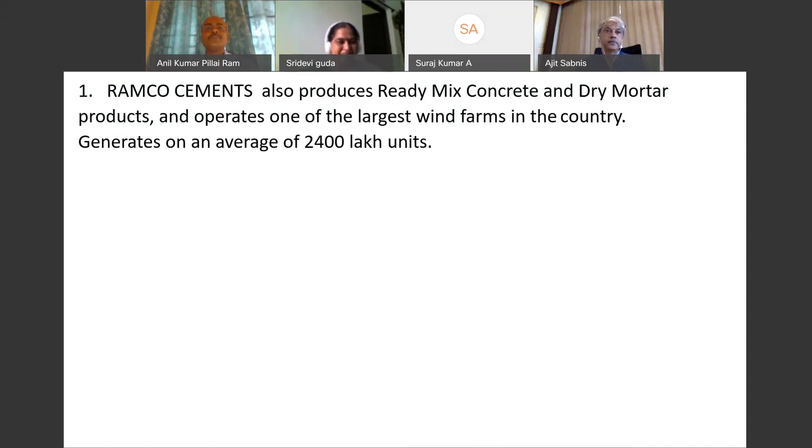Just a brief about our organization. We are also into wind energy, generating almost 2,400 lakh units per annum, related to renewable energy. We incorporate the latest technology and are pioneers in blended cement, which is one aspect of sustainability that has always been of great importance to Ramco Cements. We have won several awards for energy efficiency, as well as in mining, manufacturing, and CSR activities.

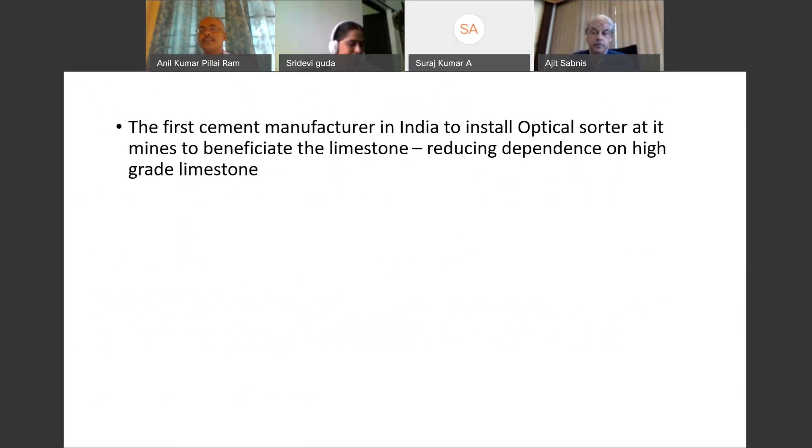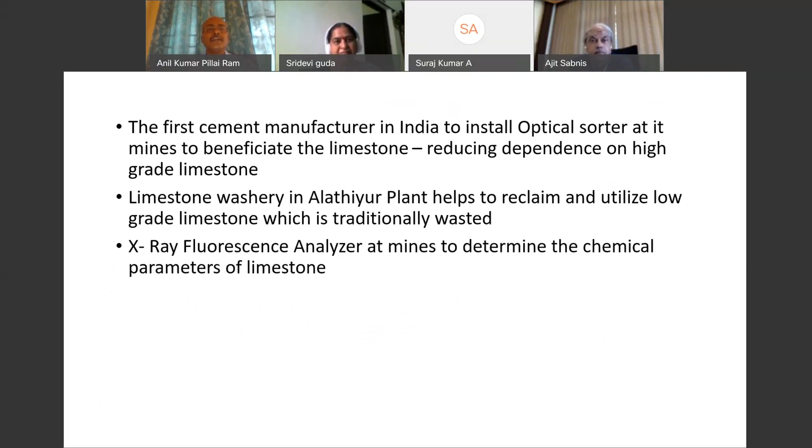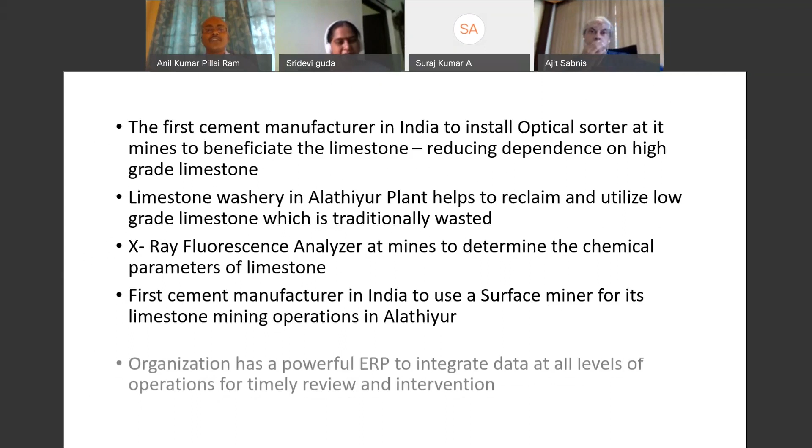Limestone is getting depleted day by day, so we need to manufacture good quality cement while ensuring natural resources are available for future generations as well, because that is what sustainability is all about. We have taken several initiatives in that regard, and we have testing equipment ranging from X-ray fluorescence analyzers, because it's important to determine the quality of incoming raw materials in cement manufacturing. Mining also needs to be environmentally friendly, and we have a powerful ERP to integrate all this for timely review and intervention.

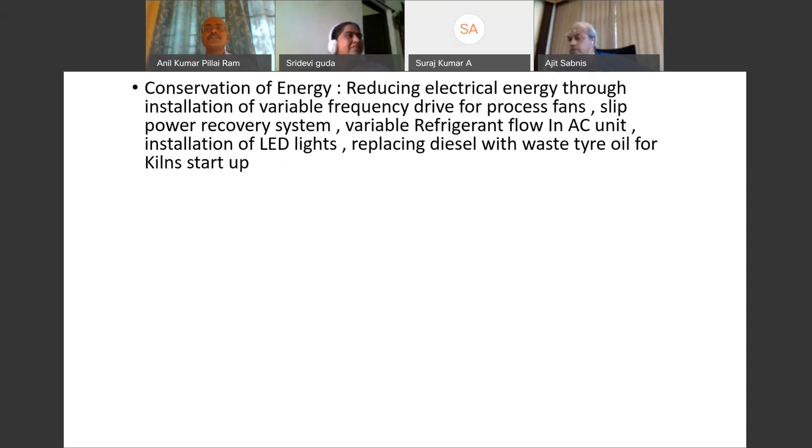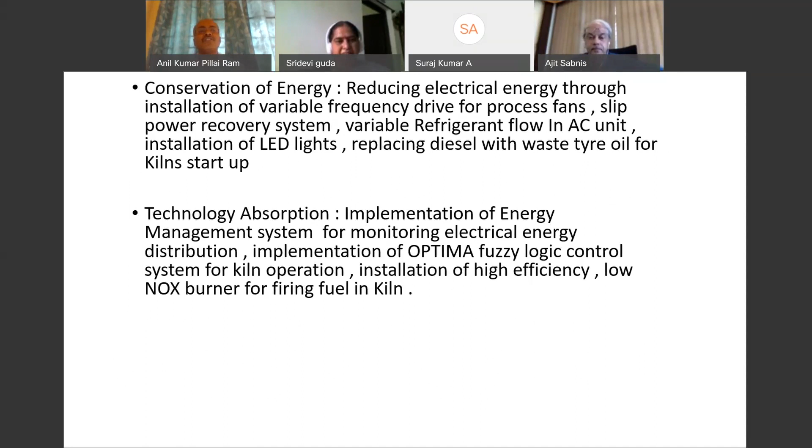These are some of the things. When we talk about sustainability, we are talking about conservation of energy, and technology absorption, because without absorption of technology, how do we make sure the process is efficient and energy efficient? So at every stage of manufacturing, we have this. Most importantly, we need to understand the characteristics of material.

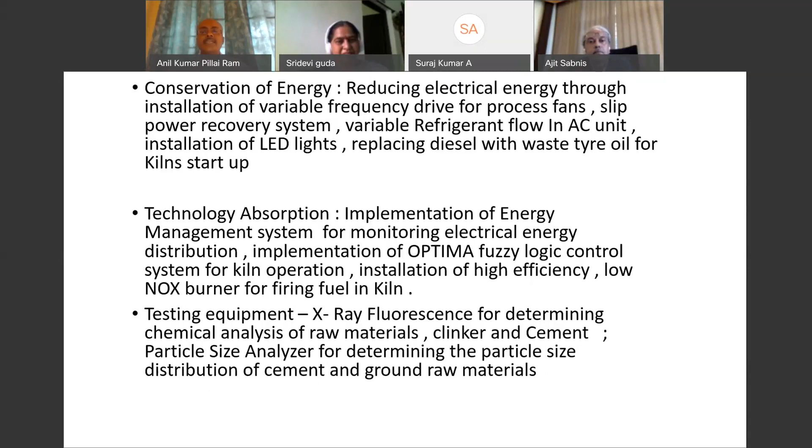As one speaker was telling, there is nothing called waste. Waste is something where we do not understand the characteristics of the material. So as long as we have testing equipment to understand the properties of all materials, I think the recycling and optimum usage of all materials would be very effective.

We have 12 brands of cement customized to various applications, ranging from RMC units to precast units to ordinary residential buildings, and dry mix products from our dry mix plant. We have the Ramco Research and Development Center to ensure good collaboration between site aspects and laboratory work, so we understand the properties of material. That's the idea of having a separate R&D center.

We have this 4 Leaves Award given to us for having adopted technology and energy efficiency measures, point source and fugitive dust control. The interaction with various customers has helped us in various ways to ensure we customize the cement.

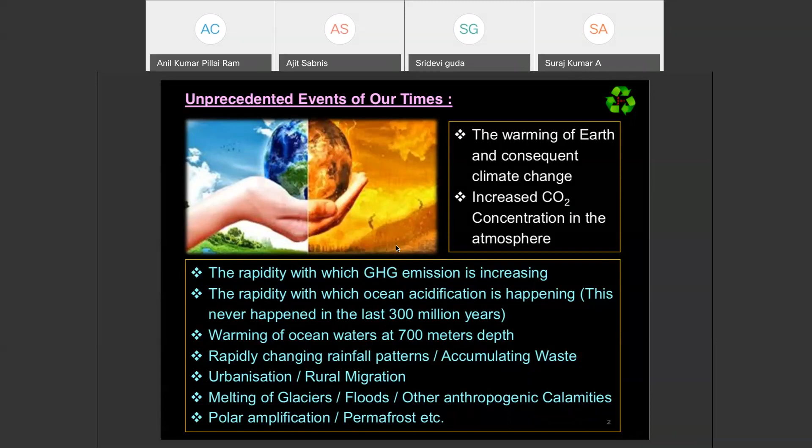Now let us look at the global footprint of buildings and the collective impact of all building materials and services. The World Green Building Council has come out with an ecological footprint, which is on your screen. Global footprint of buildings itself, if you take, it is responsible for 17% of freshwater consumption, 25% of wood harvested, and about 33 to 35% of carbon dioxide emissions.

Here, when we say carbon dioxide emissions, it actually includes several other gases, but because CO2 is very predominant among the greenhouse gases, we call it CO2 emissions, which also includes some of the other gases. It is also responsible for about 30 to 40% of energy consumption, and also responsible for about 40 to 50% of raw material consumption.

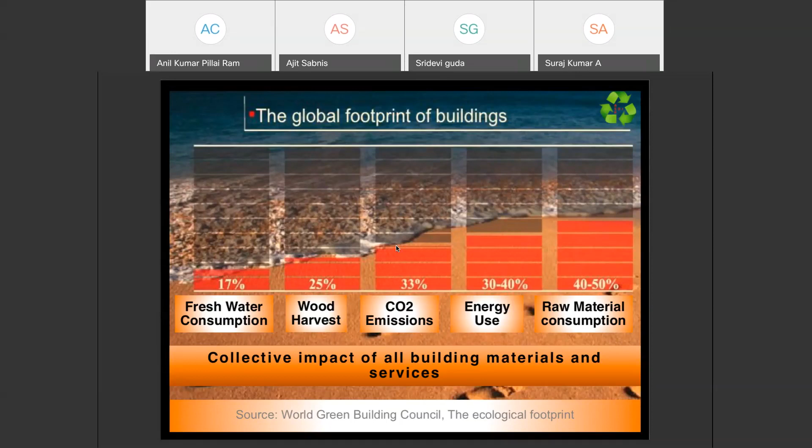Now, if we start looking at these things and come to the carbon footprint of India itself, how the construction industry is happening, how the entire building industry is responsible, what we can see is India has slowly come to be in the third position now in emitting carbon dioxide into the atmosphere. The first two are China and the US.

China, US, and other European countries put together constitute almost about 65% of the total carbon dioxide emission into the atmosphere. Though India is in the third position, even today we are responsible for about 7% of the total carbon dioxide emission. In this total emission, the construction industry contributes, as we saw in the previous slide, about 40% to the global warming or greenhouse gas emissions.

The operation and maintenance phase will consume about 75 to 80% of the energy, and pre-construction phases will have about 20 to 25%. In this, the pre-construction stage and construction phase is the most neglected phase.

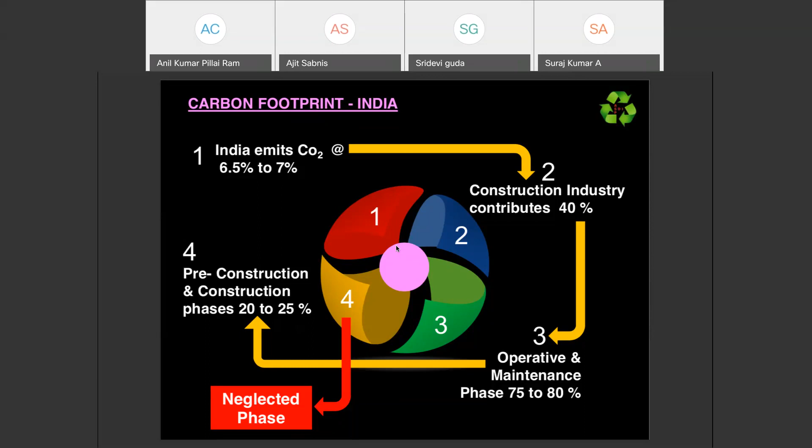Now, why do I say it is a neglected phase? Because green rating systems, etc., give importance to the green building concept and achievement of sustainability subsequent to the construction part of it. So this neglected phase of construction has to actually be given a lot of importance, and we need to see what kind of strategies we approach.

Before we get into what sustainable construction is, we need to understand certain important terminologies. One is, what exactly is sustainable development? Sustainable development is that which meets the needs of the current generations without compromising the ability of future generations to meet their own needs.

This is the World Commission definition for sustainable development. What it means is you don't have to completely dedicate or surrender your needs, etc. But what is important is to take care and keep future generations also in mind. To make resources available for future generations, what is important is the reduce, recycle, reuse concept, and then the true sustainability concept has to be understood.

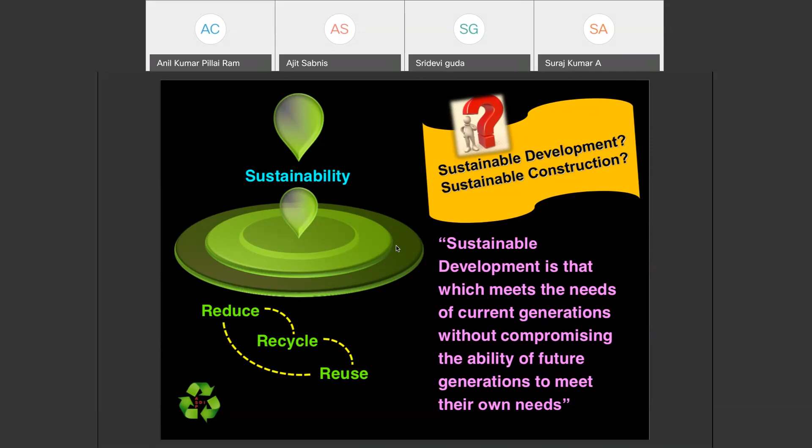Now, what exactly is sustainable construction? Once we understand sustainable development, what exactly is sustainable construction? Sustainable construction has not been very satisfactorily defined yet. We are not able to do it very satisfactorily, but there are several definitions.

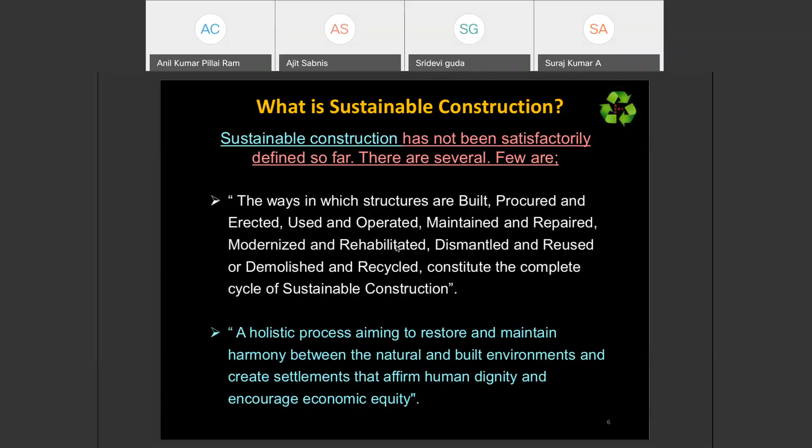Just to cite a few, the ways in which structures are built, procured, erected, used and operated, maintained and repaired, modernized, rehabilitated, dismantled and reused, or demolished and recycled, constitute the complete cycle of sustainable construction. The second definition says it's a holistic process aiming to restore and maintain harmony between the natural and built environments and create settlements that affirm human dignity and encourage economic equity. We have quite a few other definitions, and one of the most important, which I feel is applicable now, is the underlined one, the last one on your screen.

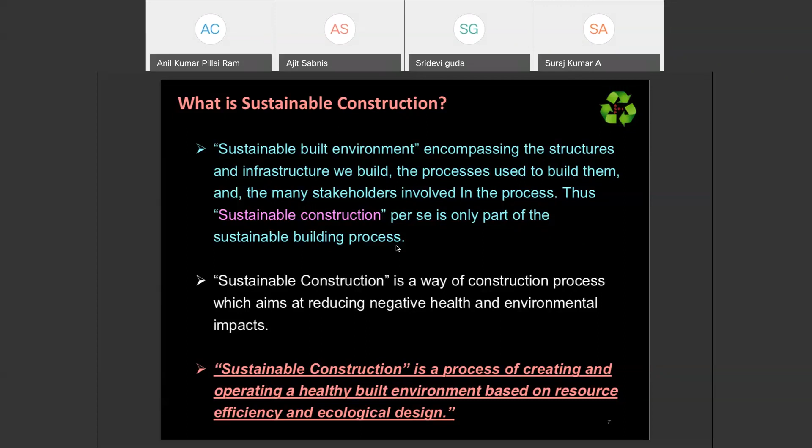I hope my talk and the screen is available to you, right? Yes, yes. If there is any problem, we will let you know, sir. It's very much clear.

Now, let us quickly understand what exactly is the greenhouse gas effect. Greenhouse gas is a gaseous compound in the atmosphere that is capable of absorbing infrared radiation, thereby trapping and holding heat in the atmosphere. Accumulation of GHG also leads to the greenhouse gas effect, and this subsequently leads to global warming.

These greenhouse gases form a blanket in the atmosphere, in our biosphere, which holds the temperature below the blanket, and which will increase the temperature.

On the screen, you see carbon dioxide, methane, nitrous oxide, perfluorocarbons, etc., which are the greenhouse gases. But the majority of it is carbon dioxide, and that is why when we say carbon footprint or carbon emissions, we actually refer to all the other greenhouse gases. Also, all these greenhouse gases are actually converted equivalent to carbon dioxide.

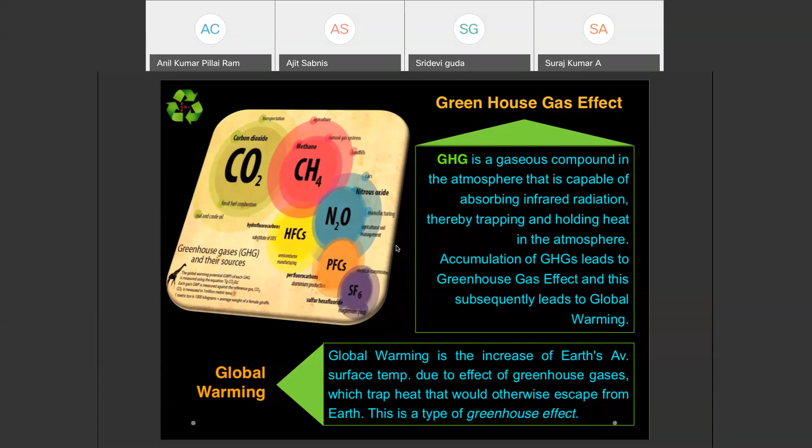Even assuming that if we stop everything at this point in time, there is already an accumulated effect of about 30 to 40 years. So whenever we design a building with a design life of about 50 to 60 or 60 to 70 years, if we do not take the greenhouse gas effect into account or make the building sustainable, we are not doing justice to our design. Our designs are not sustainable at all in the first place because there is already an accumulated effect in the atmosphere.

This greenhouse gas effect leads to global warming, an increase in the Earth's average temperature. This is the Earth's average surface temperature due to the effect of greenhouse gases.

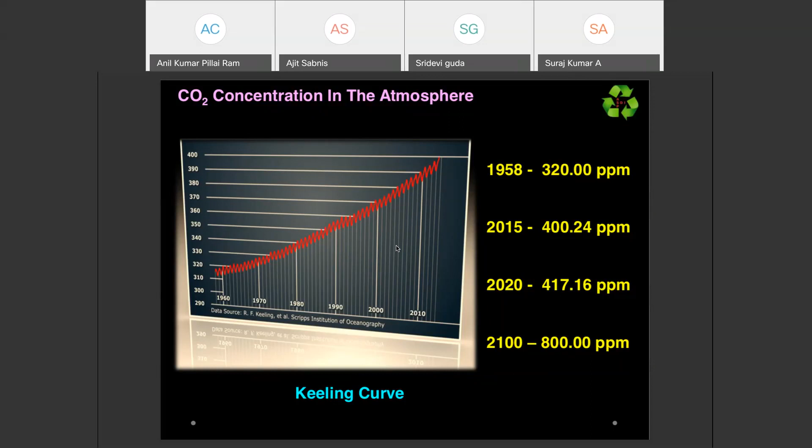From 1958 till 2015, we were in the range of 300 and less than 400. In 2015, we crossed the 400 ppm mark, and in 2020, as of yesterday, the data is 417.16 ppm. Every day, the carbon dioxide concentration is measured, and there is a table maintained by the coordinating agencies; this figure of 417.16 ppm is yesterday's record. By 2100, it is going to be 800 ppm, and they say approximately immediately after we cross the 500 mark, there will be huge health hazards and a lot of adverse impact and much deterioration.

And so that is why all the 195 countries, all these green summits that take place internationally under the umbrella of United Nations, the 2030 agenda - according to the agenda, we have to restrict the increase in temperature to less than 2 degrees. The 500 ppm, once it crosses, the 800 ppm, when it crosses, it is approximately about 4 degrees increase in the average surface Earth temperature.

Now let us understand what global warming potential means. As I said earlier, carbon dioxide is taken as the base greenhouse gas, and if its global warming potential, GWP, is 1, all other greenhouse gases are quantified in terms of carbon dioxide as its base. For example, methane is 25 times deadlier than carbon dioxide, and perfluorocarbon is about 7,400 to 12,000 times deadlier than carbon dioxide. But all the other gases remain for a very short time compared to carbon dioxide's existence in the atmosphere. That is why the most important greenhouse gas that concerns us is carbon dioxide.

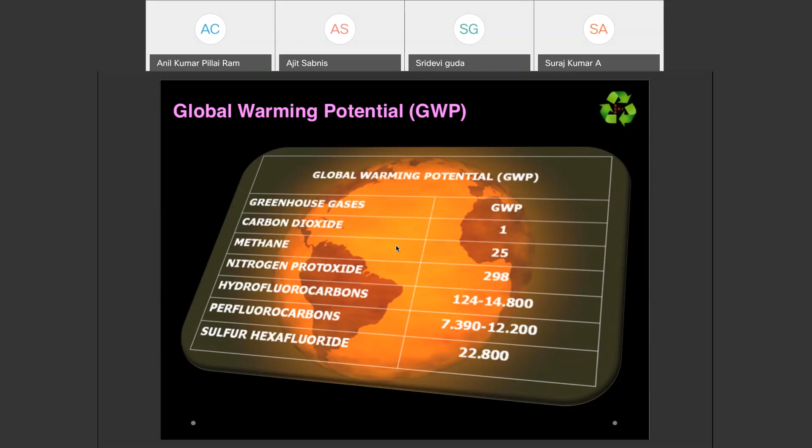So as we see in the next slide, when we talk about global warming etc., I also talked about the 2030 agenda. Now all the 195 countries across the nations are meeting almost every 2 years, drawing up lots of details. Every country has what are called national voluntary disclosures about how they're taking up the sustainable development goals, etc.

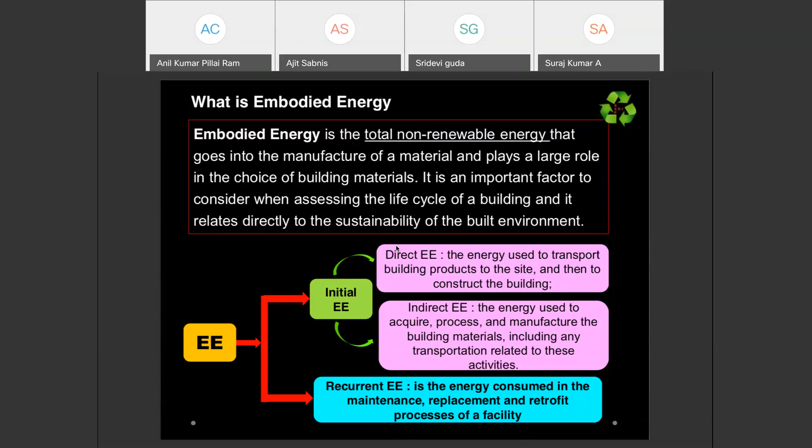The second part of it is the recurring embodied energy. The recurring embodied energy is the energy consumed in maintenance, replacement, and retrofit processes of a facility.

So once we have understood what embodied energy is, now let us understand what embodied carbon is. Embodied carbon is the carbon footprint of a material. It considers how many greenhouse gases are released through a supply chain. Embodied carbon is usually expressed in kg carbon dioxide equivalent per kg.

And I forgot to tell you, embodied energy is always expressed in terms of joules or megajoules per unit. It can be megajoules per square meter, megajoules per kg, megajoules per volume or cubic meter, anything - joules, megajoules, or gigajoules, as the number increases.

So embodied carbon can also be measured into the five principles I mentioned. On the screen, what you're seeing is the embodied carbon of building materials. There are a lot of inventories which are being updated from time to time.

There is a very popular inventory called ICE - if you go to Google, they will give you a chart that is being updated. There is also an updated chart done by New Zealand, and one being updated by ASEC, which I am also a part of. So this updating of embodied carbon, embodied energy, etc., is happening continuously.

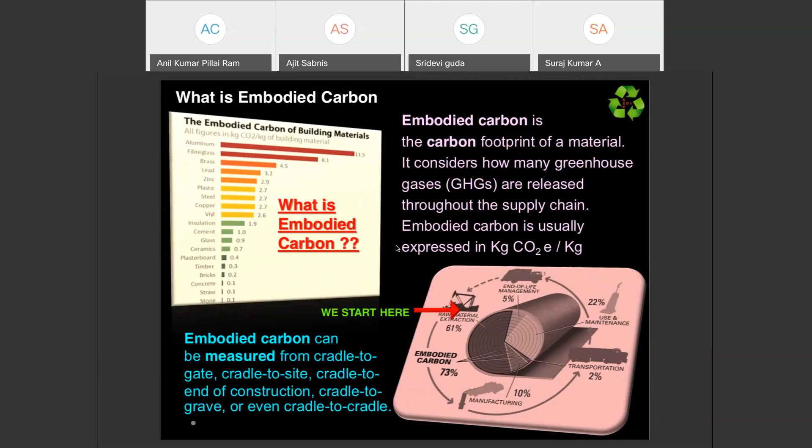So its impact - suppose even if it stays without any damage or repairs for the entire design life of a building, even if you take about 50 years - the impact of aluminium gets distributed over a large period. So per year, if you calculate the impact, it works out to be much less than other materials. So it becomes very important for an engineer to use his discretion.

Now this is just an example to show you what exactly the cradle to cradle principle and embodied carbon means - the same thing applies for embodied energy also. The energy to dig the raw materials, the energy to shape the sand, water, etc., then to heat and make blocks at the factory, then the transportation, then the energy of the tower crane, you see.

So it is shifting of the material, and this is actually the cycle which keeps happening.

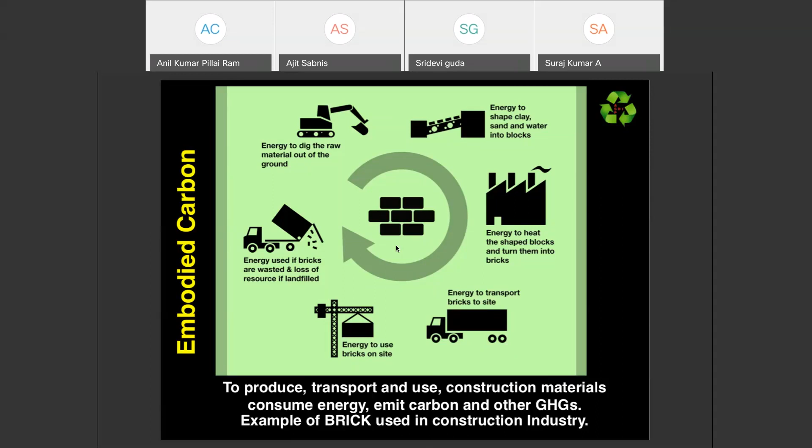Now we come to what exactly is urbanization. This is not something I have to explain; we are already seeing quite a bit of this. By 2050, about 70% of the global population will start living in urban areas.

But by 2050, scientists still hold that the global population will start living in urban areas. So it is the urban area which becomes more and more important, and it becomes extremely difficult to get land. There will be pressure on the land, etc. So the sustainability aspect becomes more and more critical for urban areas as they keep growing, and we keep accumulating higher and higher population.

Now let us come to this case. So to me, focusing sustainability aspects on urban areas rather than rural areas becomes more and more critical from a civil engineer's point of view.

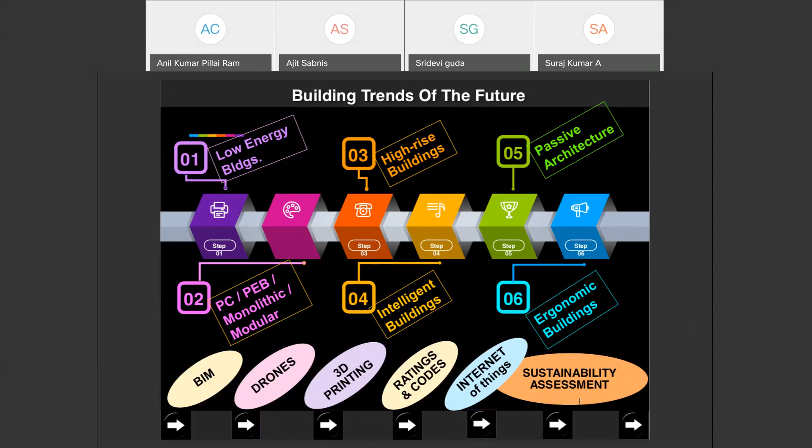So these are the building trends in the future. Now, in a nutshell, let us come to what exactly is sustainable construction. Sustainable construction involves a very wide scope of activities, primarily put under 6 categories. What are these 6 categories, which you are now seeing on your screen?

The first one is the space and structural design part, which becomes extremely important—the space designing, how do we allocate the space. That is the architect's role, and then the engineer's role; everything comes together. How do we manage the space available? As the days progress and the population increases, this space allocation becomes

more and more complicated. Then we have conventional and alternative materials, and along with these alternative materials, there shall be a huge amount of new generation materials which come into the picture. Then there is sustainability assessment, and construction technology.

As I said, what kind of technologies—whether we use slip forming, climb form technology, conventional or any other precast, modular, monolithic, etc.—that becomes extremely important. And building automation, as I said, comes into the picture, artificial intelligence comes into the picture.

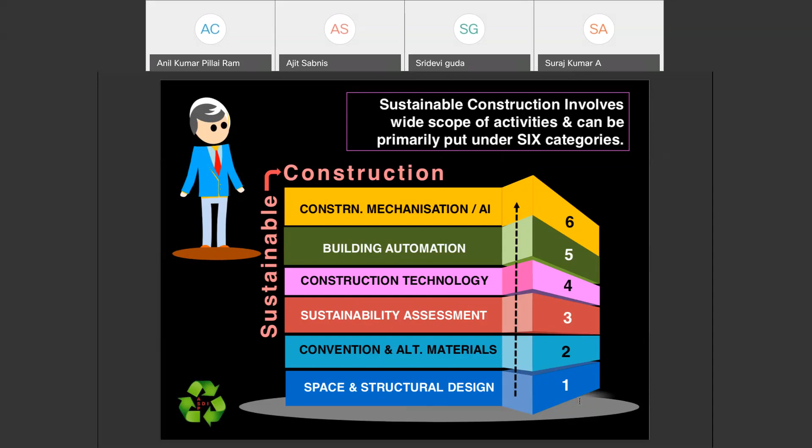And construction mechanization is going to play a major role, which becomes inevitable. This helps to a very great extent—how do we actually account for the shortage of labor, etc. These things come into the picture.

Now, slowly we are actually coming and moving towards sustainable construction. We understood what exactly is the definition of sustainable construction, the different terminologies involved, and the main 6 phases of construction activities. Sustainable construction is not just on-site construction; it involves all that we saw in the previous slide.

Now there is one more important thing. If you take the life cycle of a building, it has got 4 phases. The first is the pre-construction phase, the second is the construction phase, the third is the operating or operation and maintenance phase, and the fourth is the demolition phase.

Now, the total energy consumed breaks down between 20 to 25% and 75 to 80%. About 75 to 80% belongs to the operating and maintenance phase, which is mostly streamlined because of new generation materials, building automation, and the efficiency of gadgets, lighting, and equipment used for human comfort. All these things are more or less streamlined.

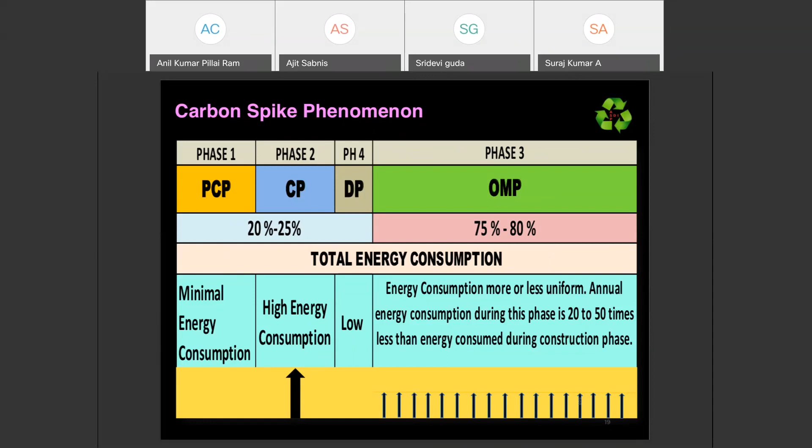So it becomes all the more important for civil engineers to give importance to the construction phase, where we see the carbon spike phenomenon extremely dominant.

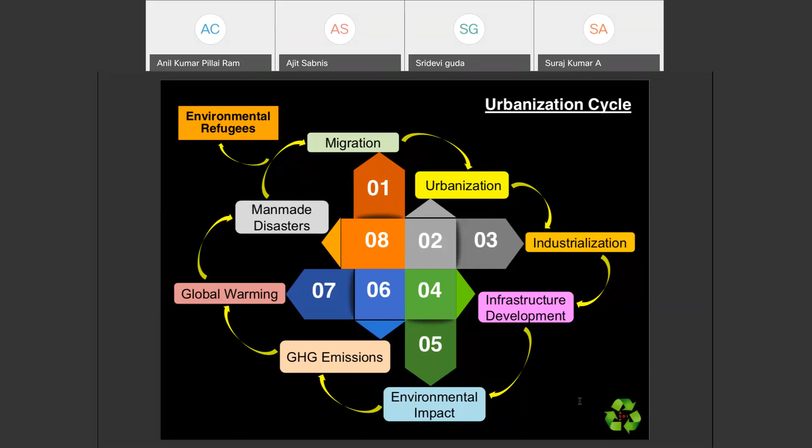Again, this leads to migration. This population migrates because of man-made disasters—for example, a population moving because of a flood. These people don't move to cities or urban areas for a better lifestyle; rather, the percentage of population that moves from disaster areas is mainly looking for safety, such as flood-affected people moving to higher altitude areas. These are called environmental refugees, an important term we need to understand.

Now, next is sustainable construction design. We need to keep the urban heat island effect in mind, which causes a lot of microclimate changes. Because of pressure on land, many architectural and natural laws cannot be followed.

Because of that, a lot of heat gets onto the surface and is reflected back, which adds to the heat in the atmosphere and within communities, where clusters of such buildings cause the heat island effect phenomenon very prominently. As a result, air conditioners are used more, further leading to greenhouse gas emissions.

So dear students, what is important is when we start taking design into consideration—until now it was okay, but going forward, we need to take all these things into account.

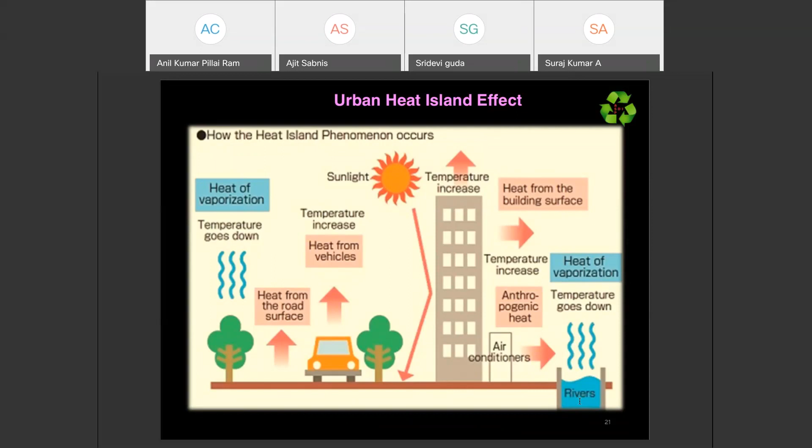Now, keeping these things into account, all 195 countries came together and established all the challenges faced by entire humanity. These were classified and distributed into 17 goals, called the Sustainability Development Goals. The entire challenges of the planet are classified and put into these 17 goals, which are further subdivided into almost 169 targets, etc.

Each state and country has further subdivided these goals into mini goals. India, for example, has about 569 targets. So all the research happening around the world is being requested to focus on any one of the 17 goals, which means the research doesn't remain just research, it becomes part of the solution for these sustainability development goals.

Now, as civil engineers, we are directly responsible for about 6 to 7 sustainability development goals. As you can see on the screen: SDG 4, which deals with education, SDG 6 on management of water and sanitation, SDG 9, SDG 11, SDG 13, SDG 17 - we are directly connected with these sustainability development goals, which means civil engineers have a major role to play in sustainability development goals. So what exactly is the need of the hour?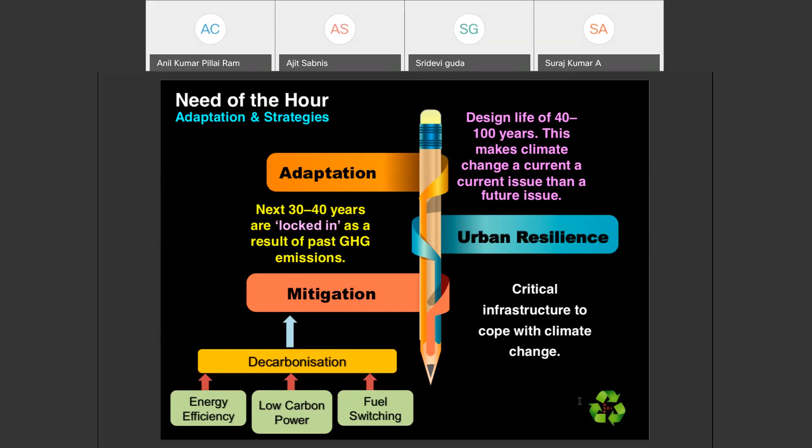There is a requirement by nature from the buildings, and there is a requirement by humanity for his comfort, also from the building. So how do we strike a balance between these two - that actually plays an important role for the civil engineer. And that is how we come to the understanding of the thing.

Now we have talked about adaptation - how do we adapt to climate change, etc. There are many locked-in periods now; we need to systematically adapt to the change. I will rush through because the presentation is quite long, and this will probably be made available to you - hopefully on YouTube - so I will skip reading these slides in detail, and go to sustainable adaptation and urban resilience, which we already talked about.

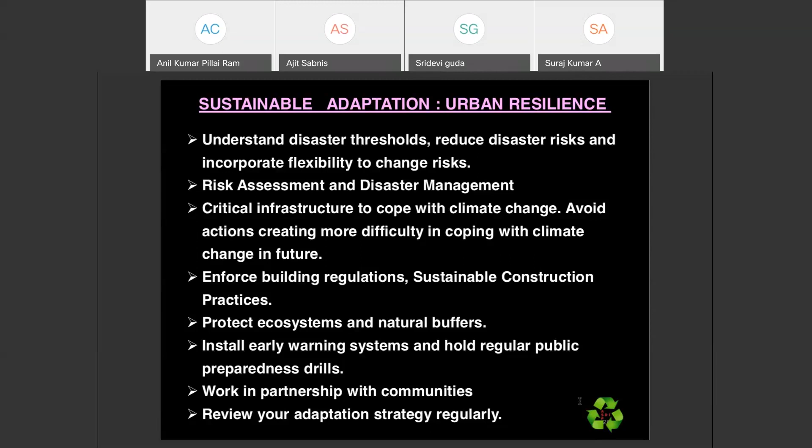Now, what exactly is decarbonization? We need to mitigate. When we start the mitigation strategy, we need to reduce fossil fuel burning and increase carbon sinks - for example, reduce deforestation, increase forestation area, and increase all parameters where carbon assimilation happens. Control the population, mitigate migration through rural development, etc., and improve energy efficiency. In a nutshell, these are the important ways we decarbonize infrastructure projects, buildings, etc.

You infuse efficiency, energy efficiency, and then low carbon power, and then switch the fuel, which means to say switch over from fossil fuel to green, clean energy buildings.

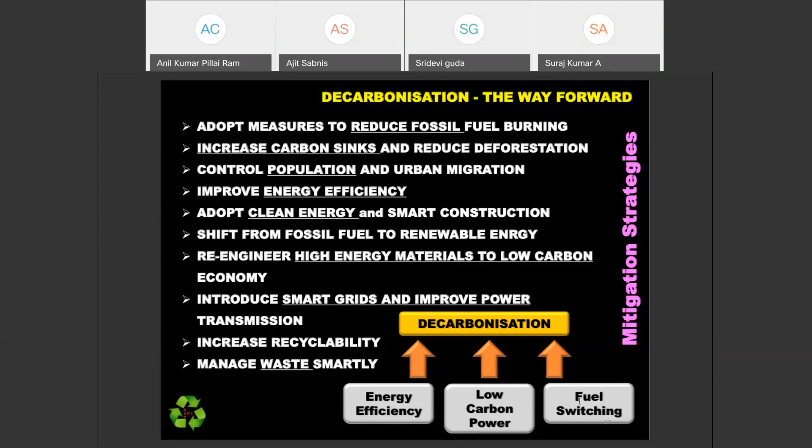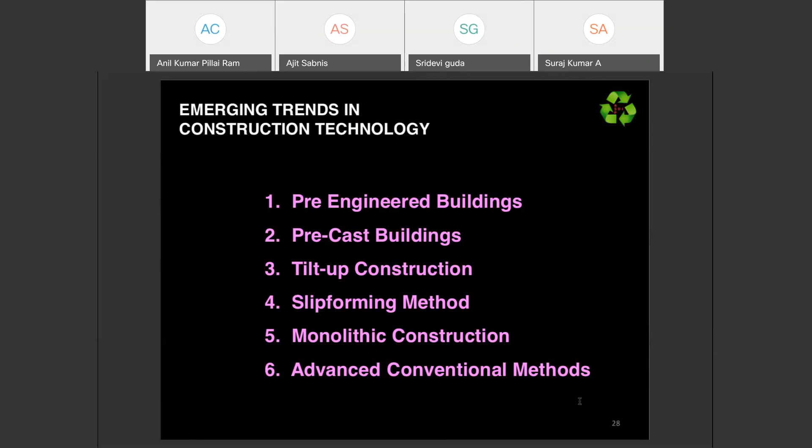Now, emerging trends in construction. In the earlier slides, we saw what exactly these are. Now in the future, we are going to have these construction trends. So we will go one by one. There are going to be pre-engineered buildings, precast buildings, tilt-up construction methodology, slip forming, monolithic construction, advanced conventional methods, etc., which we will actually see.

This is one example of a pre-engineered building. We are all aware what exactly a pre-engineered building is. This is completely steel construction, and probably a combination of steel and concrete will also be there because of the metal decking, etc. The cladding will be of metal sheets. This is faster construction, and this is going to gain more and more importance.

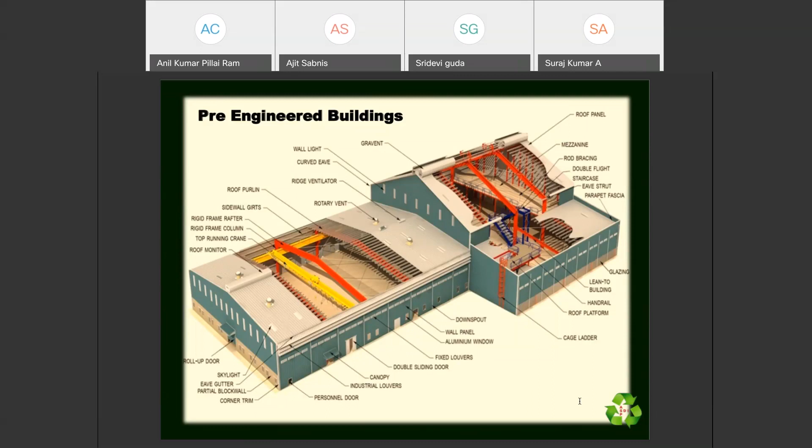The next one is the precast buildings, which we see in construction. All the precast units will be cast at some other place, maintaining the quality, reducing the wastage, maintaining the aestheticity, etc. There are a lot of advantages and benefits from the precast industry, which we are going to see.

Only thing is, because of the paucity of time, we will not be able to go through completely the precast construction, but it is there.

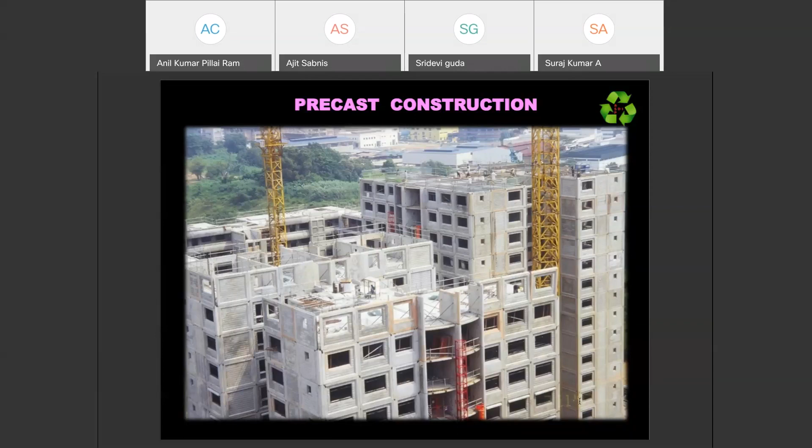The next one is precast honeycomb construction, which is also going to gain a lot of importance. What you see actually is the precast pods which are created, and then they are lightweight material used as facades, etc., with a lot of benefits.

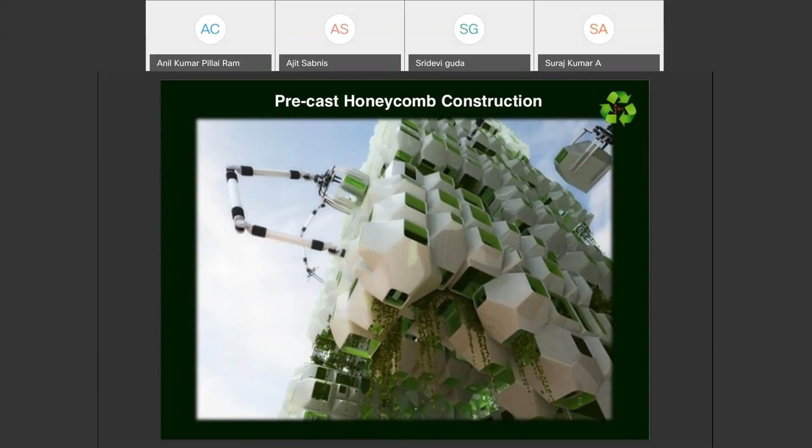Now, biomimicry is also one of the important aspects, where biomimicry is a process where we follow our design to something similar to nature. So there are quite a few buildings, for example, bullet trains are built matching a kingfisher's beak. There are a lot of structures like this using biomimicry.

Then the tilt-up construction technology is the place where the wall panels, etc., are cast on the sides of where the erection has to take place, and then with the help of cranes, etc., they are tilted. The timing will be there, the quality will be maintained. As with any precast, this is the biggest advantage.

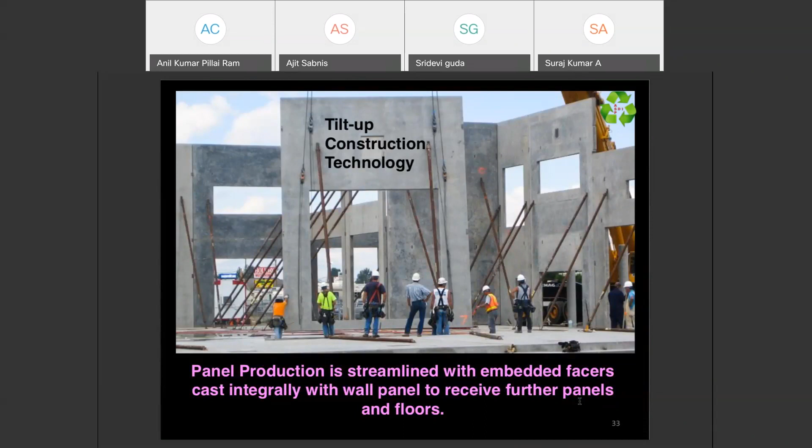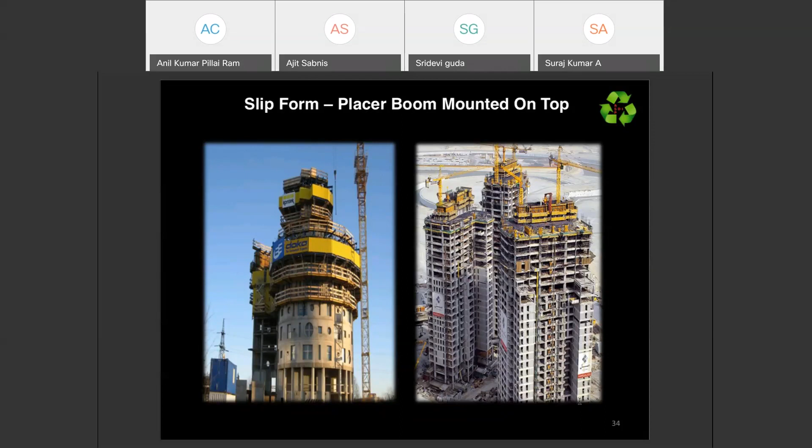Now, this is going to attract more use, and of course this is the placer boom mounted on top of the slip forming equipment or the jump form equipment, where for extremely tall structures, these kinds of construction technologies, the advanced formworks, get used. On the right, what you see is the core of the Burj Khalifa being constructed, and the other one is one of the towers in China. These are technologies which we keep coming back to.

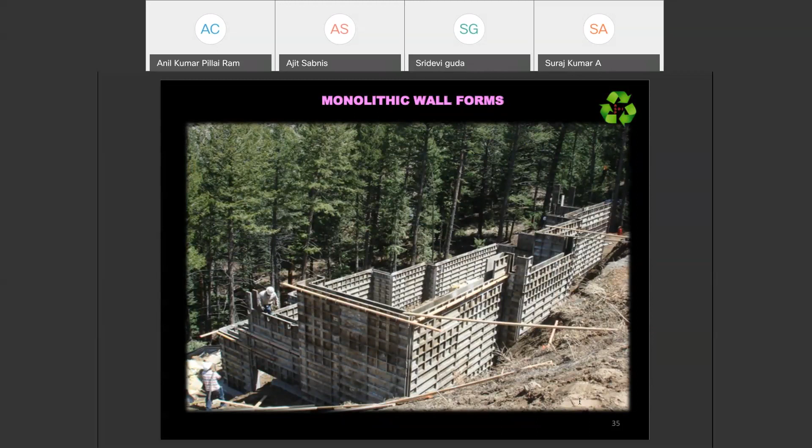The next slide shows construction that most of us are very familiar with, where the floors and walls are cast together. Everything is cast together. It has its own advantages and disadvantages. Along with these kinds of formworks and different formworks, concrete technology also evolves by itself.

Now, this requires self-compacting concrete and all those wonderful formworks. And what you see here is another concept of formwork which is called flying form of formwork. This is where we come into the use of advanced formwork techniques.

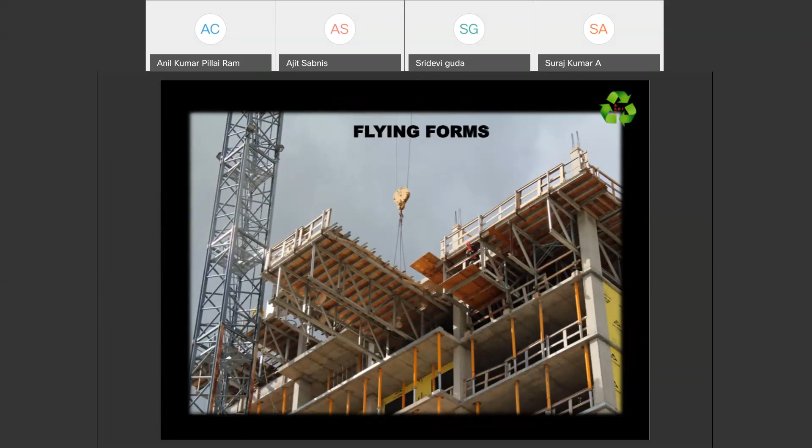Now, when we talk about construction mechanization, we have so many equipment which come into the picture, which help increase productivity, increase efficiency, improve quality, and also reduce wastage. For example, if we use a beautiful formwork, we avoid the entire activity of plastering. Thereby, we save the natural resource which we call sand.

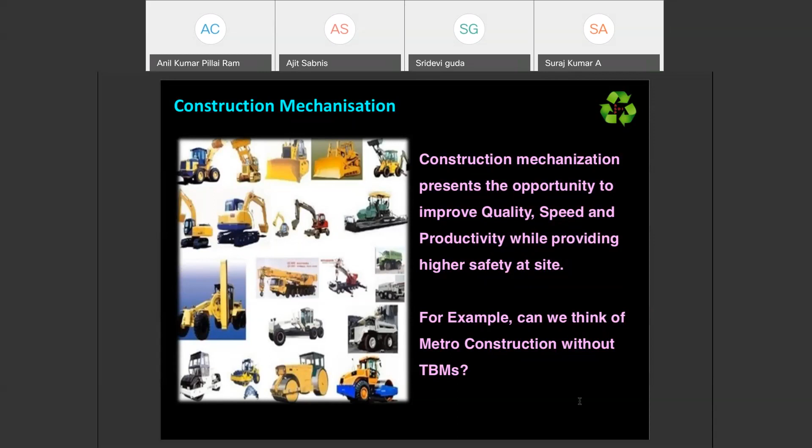For example, can we think of metro construction without the presence of tunnel boring machines? It's impossible. We would have taken centuries together to actually do underground metro construction, what I'm talking about. So we need to synergize and bring harmony between the mechanization.

For example, what we see here is the steel fabrication in the yard itself. The AutoCAD drawings, etc., are fed into the system, and the bar bending schedule is generated, and then fed directly, and complete mechanization and automation is ready. Each set of reinforcement is separated, segregated, designated, and it's ready to come and start fabrication at the site.

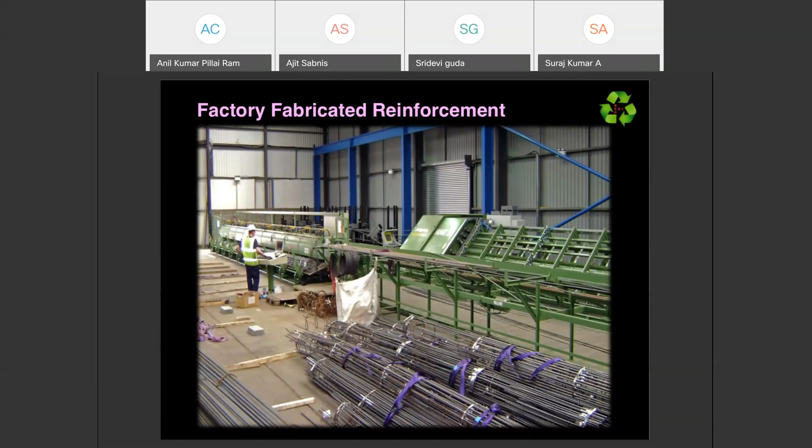So these kinds of automation, we need to save time, we need to get into the picture. Now we also talked about building automation, and what kind of building automation are we talking about?

We are talking about civil engineering, and there will be a lot of specifications. We will require our buildings to be energy efficient, seamlessly integrated into nature, and self-sufficient in terms of water and energy, meaning our buildings have to be zero energy buildings. We should have a very high percentage of fenestration without curtains, autochromic glazing, and smart, intelligent wall panels that store energy. All these demands will actually become the specifications.

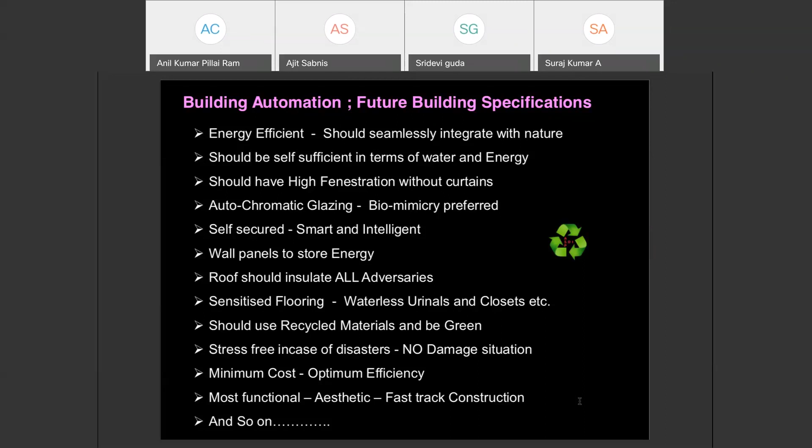Parallel to this, we also have new generation materials coming into the picture. What exactly are these new generation materials? You can go into the details separately and make your own study. Now we have what is called bendable concrete, self-healing concrete, translucent concrete, electrified wood, bioengineered bricks, sensitiles,

which is extremely sensitive to the temperature inside and outside and changes its color. So you really don't need curtains at all, and you also don't need to run your ACs because the glass is taking care of it automatically.

Then there is cross-laminated timber, which is gaining a lot of popularity. This is also called mass timber construction. This cross-laminated timber is being used as material for the framework in place of steel and concrete. One building, a 6-story building, is happening in Delhi. And there are quite a few buildings already done, including an 8-story building using this cross-laminated timber. You can probably Google search and get more details.

Then we have carbon fibers and hempcrete, which is also a concrete, a porous concrete kind of thing. Then we have very strong 3D graphene material, which in future is probably going to replace reinforcement. Then we have eco bricks, etc., intelligent fixtures, facades, panels, solar. All these are new generation materials which are going to play a major role.

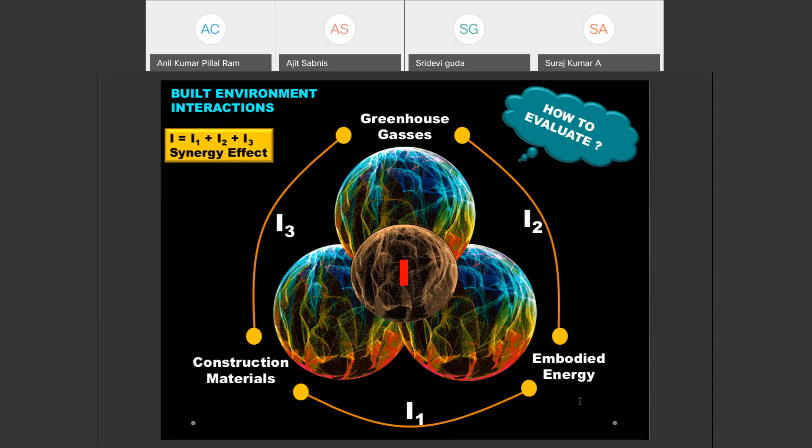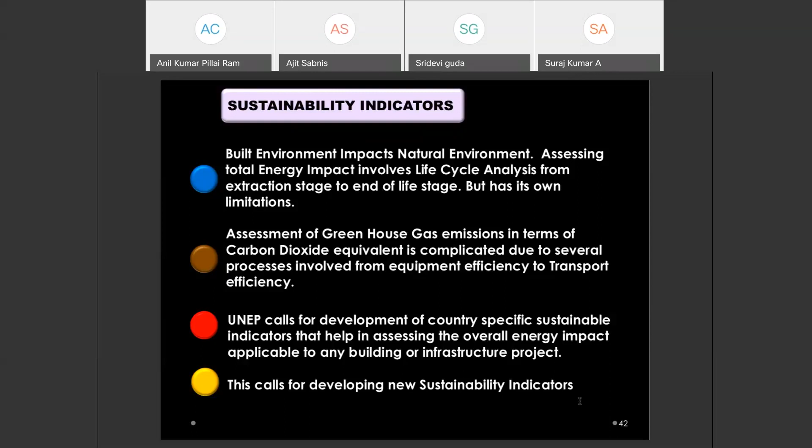Now there are several sustainability indicators. I would not like to go into these details, but there are a lot of indicators such as life cycle analysis, where we calculate embodied energy and embodied carbon. The United Nations Environmental Program calls for the development of specific sustainable indicators or sustainable development indices, based on climatic conditions and even city-based factors. Several sustainability indices have already been developed for various things.

This is a well-known pie chart, with activity percentages divided accordingly. This represents the foundation works, etc., showing how much each activity consumes. The superstructure, for example, consumes about 25%. All major activities are split up on a percentage-wise basis.

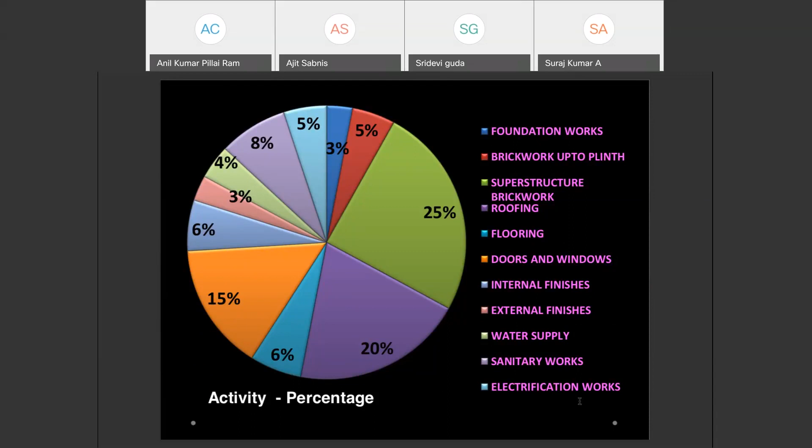So now let us come to a case study where I have considered an 18-story building, about 18 floors of RCC framework, with an area of about 2 lakh square feet, or 25,000 square meters.

Walls comprised of solid concrete blocks. Flooring is in combination - ceramic tiles, marble, granite, cement flooring, vacuum dewatered flooring, etc. Joinery is also a mixture from wood to UPVC, formwork conventional, waterproofing crystalline method, etc.

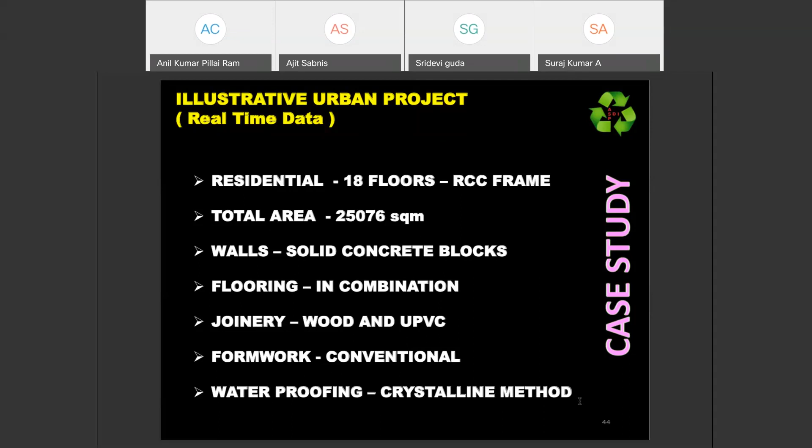Now, how do we start going ahead with this? I will give you a sustainable construction approach. Prior to sustainable construction, we need to understand where exactly the building stands from a sustainability point of view. Once you have the building parameters, they can be classified into several primary parameters as shown here.

What exactly is the role of concrete? Per square meter of the entire quantity, you can arrive at this, and then calculate using life cycle analysis what exactly is the embodied energy of a particular building. For this particular building, the total embodied energy comes to about 5,185.73 megajoules per square meter - this is the total embodied energy of that building in consideration.

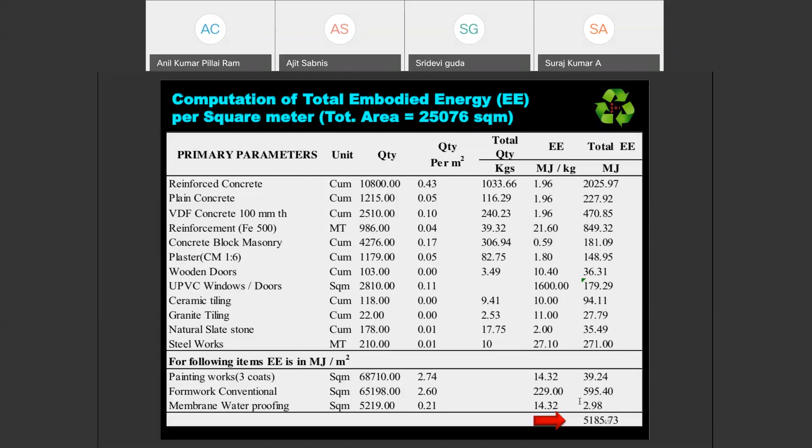If you put this in a pie chart, this is how it looks. Here, concrete takes the major impact from the embodied energy perspective. The second major impact is steel works. When we talk about concrete, it is not the aggregate or the sand, it is mainly the cement - I'm sure Anil Pillai will agree, since he's from the cement industry - mainly because of cement usage. That's the reason alternative materials for cement, like cementitious materials, are coming into the picture.

Next contributor is steel. And the next most important parameter is formwork, which is the most neglected. I really don't know how many of our engineers have a complete idea of formwork. It is just left in the field - left to the carpenters, who take least interest in seeing what exactly is the formwork and how we can reduce the energy impact because of it.

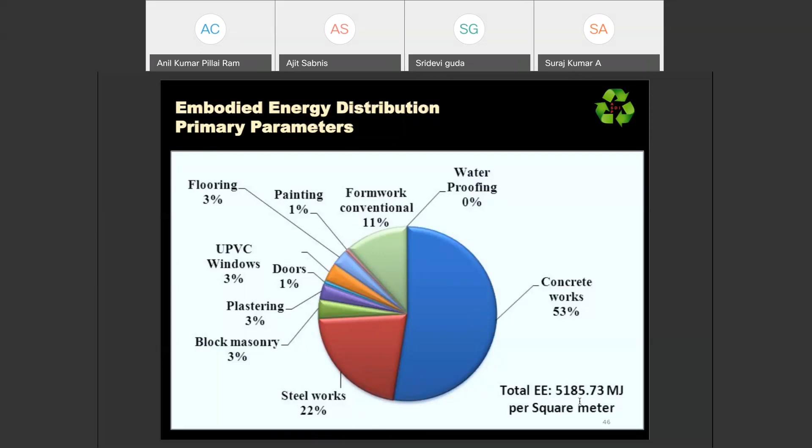Now, in terms of cost, what does this mean for the building? Let's look at embodied energy for a few seconds. 5,186 megajoules per square meter is the energy, and the total embodied component for the entire building comes to about 13 crore megajoules. Assuming 3.64 megajoules per kilowatt hour equivalent to 1 unit of electricity, and at the rate of 8 rupees per unit - the commercial rate of electricity - it comes to about 29.12 crores.

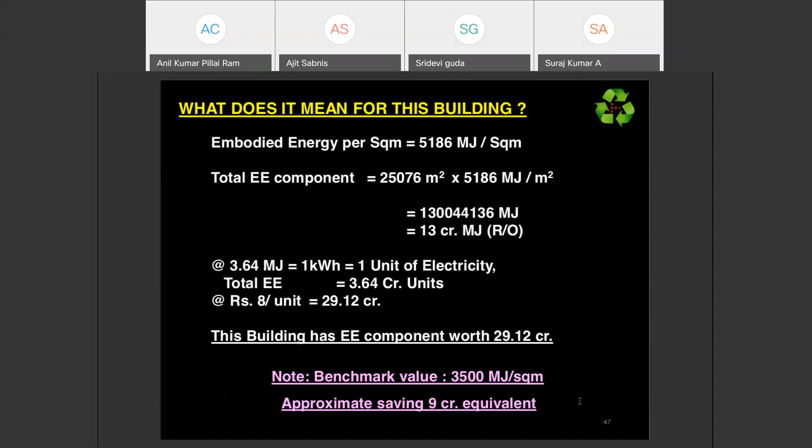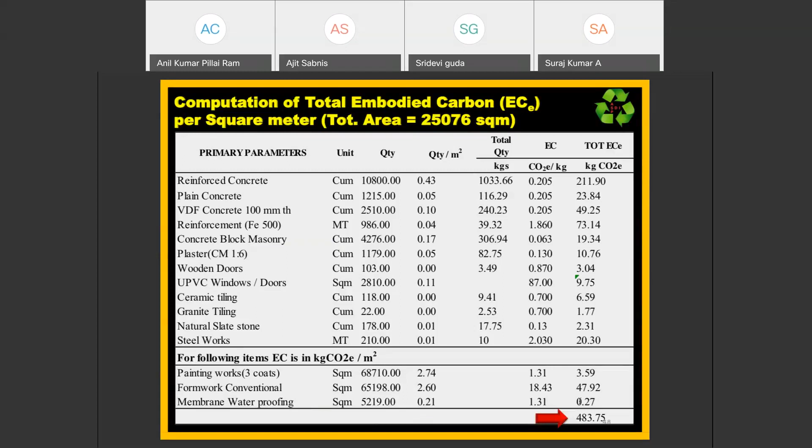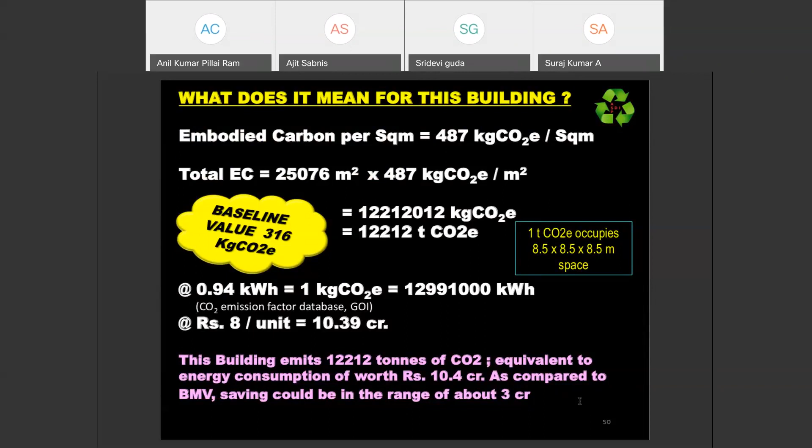Apart from that, we talked about analyzing a building from the embodied energy perspective, then from the embodied carbon perspective. Now, what exactly is a sustainability development index? Only from the embodied energy point of view or embodied carbon point of view, it may not be sufficient to design a sustainable construction. We need to take embodied energy into consideration, and embodied carbon.

We need to take several transport energy components. We also need to take greenhouse gas impact into account, because there is already a greenhouse gas impact from the interaction of various materials, as we saw in our previous slides. And other environmental indicators need to be taken into consideration, which we are lacking at present.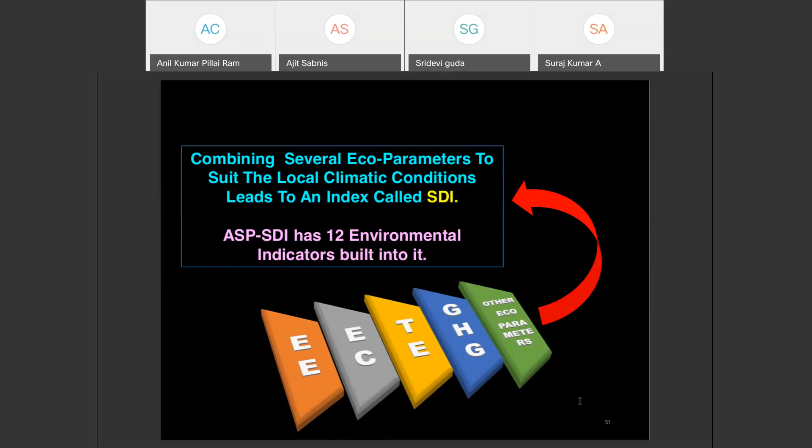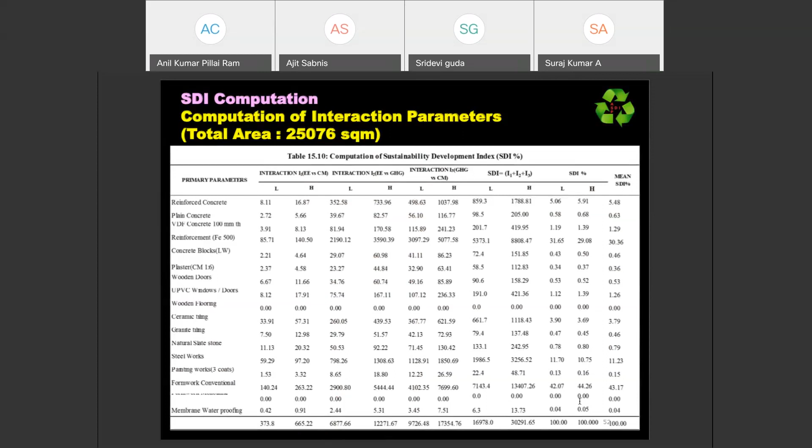So in all this, as many environmental indicators you infuse into your design, the closer we become to sustainable construction. Once we take these things, it is possible to analyze the same building using this table, which looks complicated—and it is, with a lot of mathematics involved. But based on the Sustainability Development Index, we can arrive at the same distribution as we did for the low embodied energy and embodied carbon components.

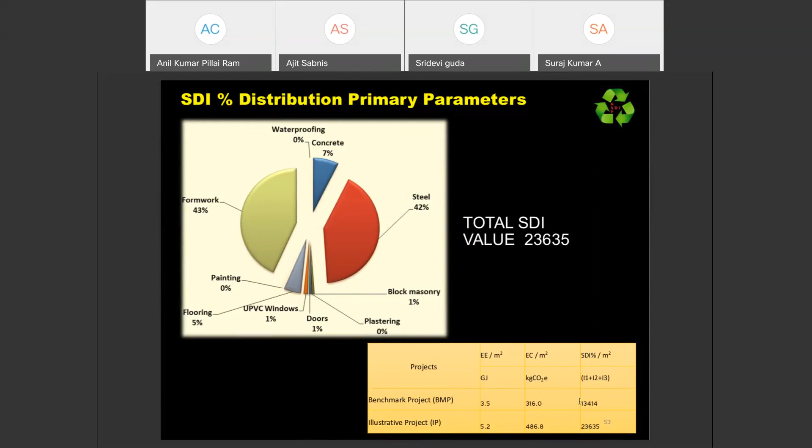So the total value here is about 23,000—it's just a number. For example, we can compare the three from embodied energy perspective, embodied carbon perspective, and from the sustainability development indices perspective.

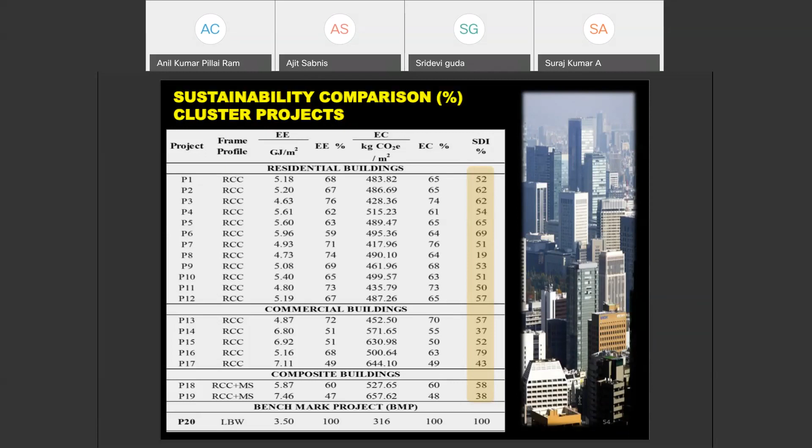Now, I talked about this for one building. The same can be applied to a cluster of buildings and compared to a benchmark project. We need to establish a benchmark because there has to be a comparison. Once we have details of various projects, we can apply statistical methodologies to find the mean value, standard deviation, variance, and baseline values.

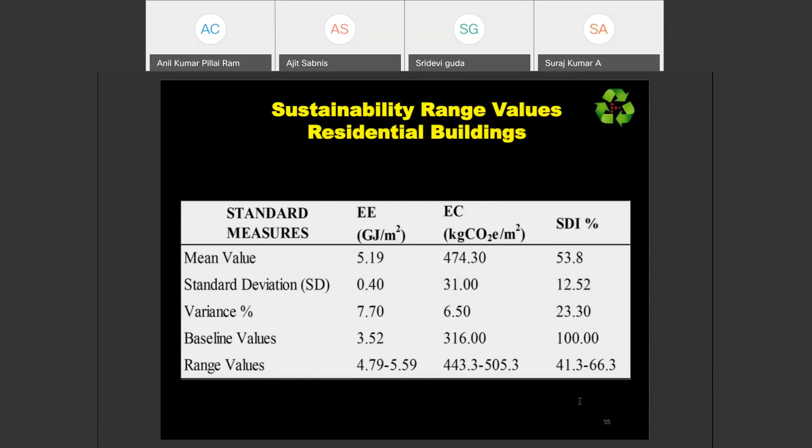We can also arrive at ranges, and graphs can be plotted for a residential project so we can classify them into no sustainability zones, low sustainability, moderately sustainable, and high sustainable. For example, what you see at the bottom is the baseline value. Compared to these baseline values, we can project the entire application with respect to embodied energy.

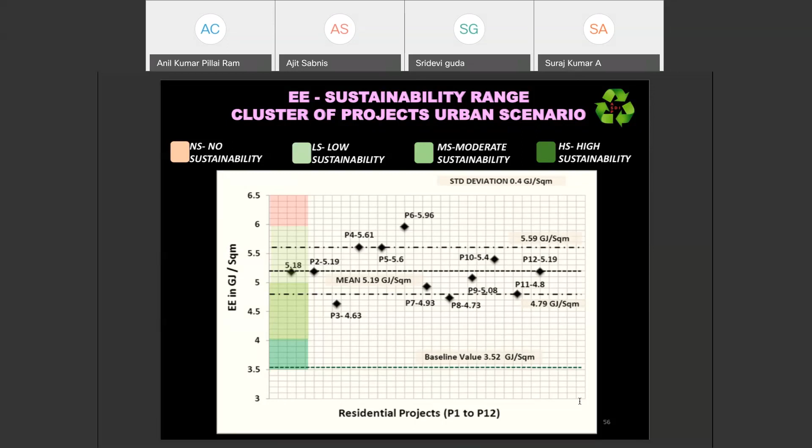What you're seeing on screen is, from the embodied energy perspective, how can we classify the buildings? Similarly, from the embodied carbon perspective, how can we classify the buildings? And from the sustainability development indices, how can we cluster the projects? All these things can be done.

Not only for a particular building, but all these methodologies can be applied at the conceptual stage once the bill of quantities is ready, so we can understand whether the building is sustainable or not. Once we understand the building is not sustainable, it's not yet constructed—we're still at the conceptual, designing stage. We can alter the material, alter the methodology, substitute optional materials, etc., and we will have a lot of potential to reduce impact and design a sustainable building.

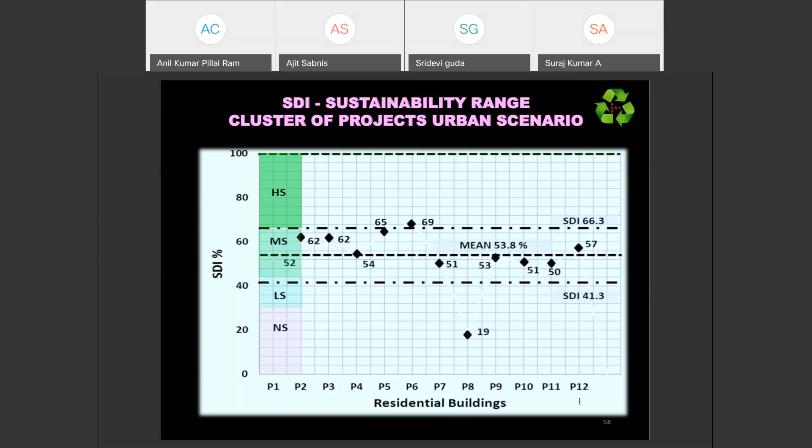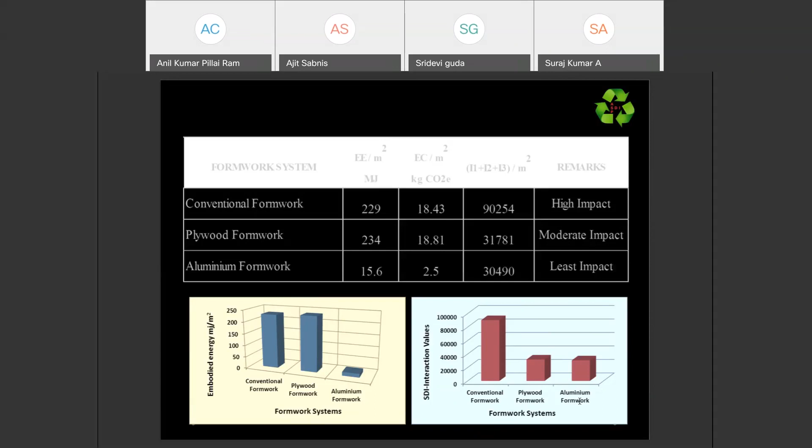From all three perspectives, aluminum formwork appears to be the best—only from the economic point of view, you should have a minimum built-up area of construction for it to be economical. But in terms of, for example, monolithic construction with aluminum formwork, these kinds of individual analyses can be done. The next slide tells us about the design steps, which I have already explained.

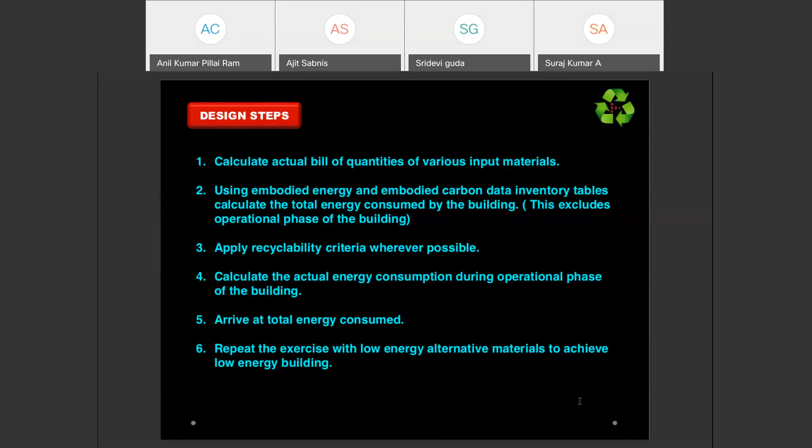So the next slide will show some of the students who have taken individual projects and worked on them. For example, for walls, there are different infill materials - bricks, mud brick, concrete blocks, aerated blocks, etc.

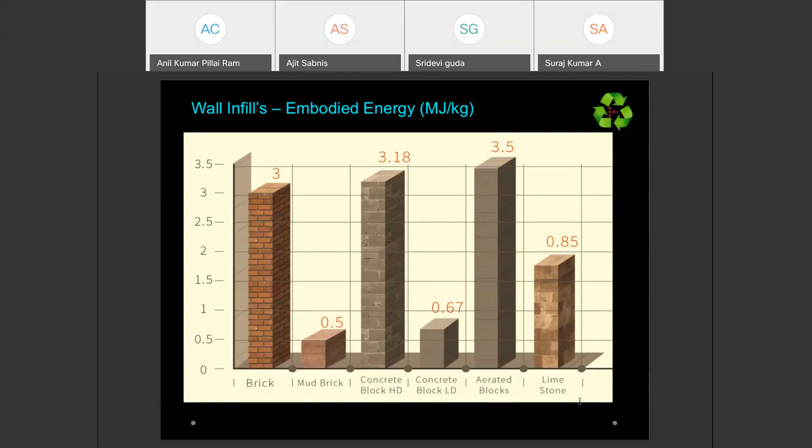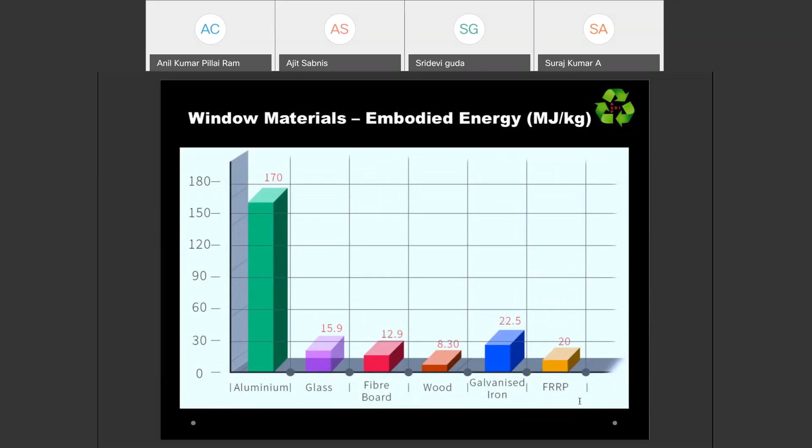From the embodied energy perspective, we find that mud brick or soil cement block consumes low energy. We can take different materials and come to an understanding of which material is low energy, which material has got low carbon value.

Subsequently, the students took about 6 or 7 projects, analyzed the whole thing from embodied energy perspective, embodied carbon perspective, and the sustainability development indices provided to them, life cycle analysis. Finally, they classified the buildings, ranging from 5% impact to 74% impact, which has got the highest. So these different embodied energy rankings can actually happen.

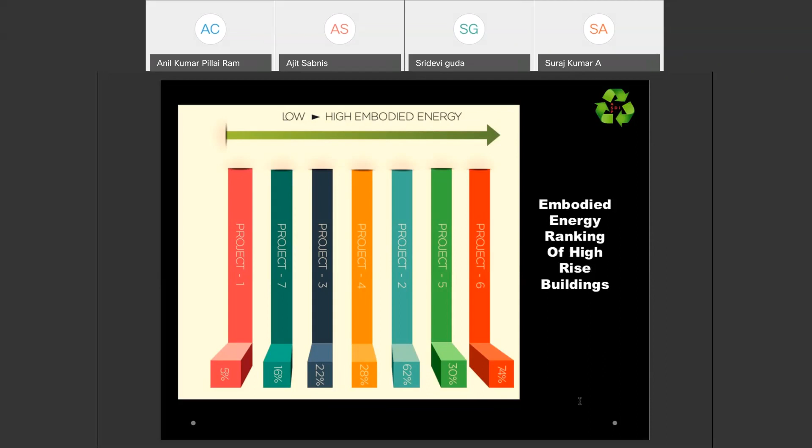Now there are a lot of building codes - the energy conservation building code talks about it, and we also have the national building code which comes into the picture. A lot of things are already there, but still we are waiting for specific guidelines which are required by the construction industry.